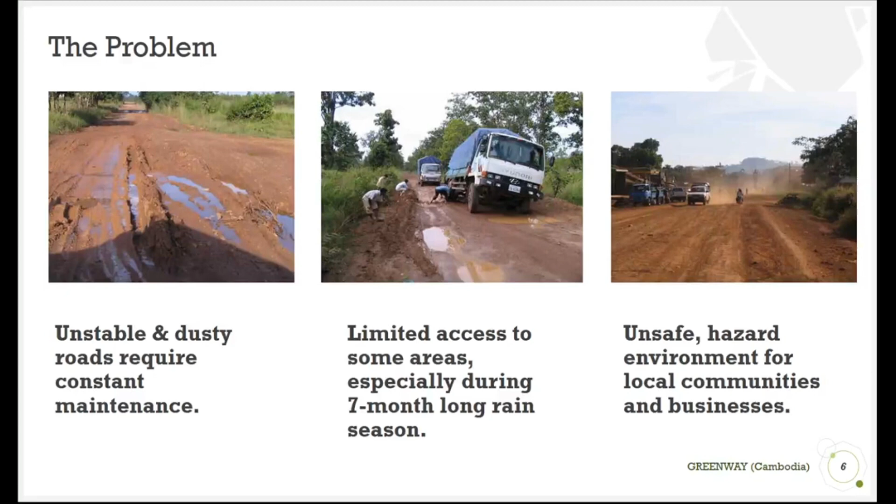It's very difficult for people in terms of daily life, the daily commute. So it's a huge problem. Next slide, please. How big is this problem, specifically talking about Cambodia? Cambodia has over 65,000 kilometers of road, and more than 74% of the roads are unpaved. So this is 50,000 kilometers of unpaved road.

It causes huge difficulties and challenges for people to commute in the provinces, and for the government, it requires huge expenses to maintain these roads. Every year, it requires routine and periodic maintenance. So it's really a huge problem, but step by step, it could be possible to fix with our product in a more cost-effective way. You will see later on. Next slide, please.

What product have we developed to address this problem? The first product is called ROAD//STABILIZR. It's a concentrated liquid form, and once it's delivered into the soil, mixed with the soil and compacted, then you have a road with increased CBR, California bearing ratio. CBR could be increased by 200–300% from the initial CBR, and it gives very high durability of the road.

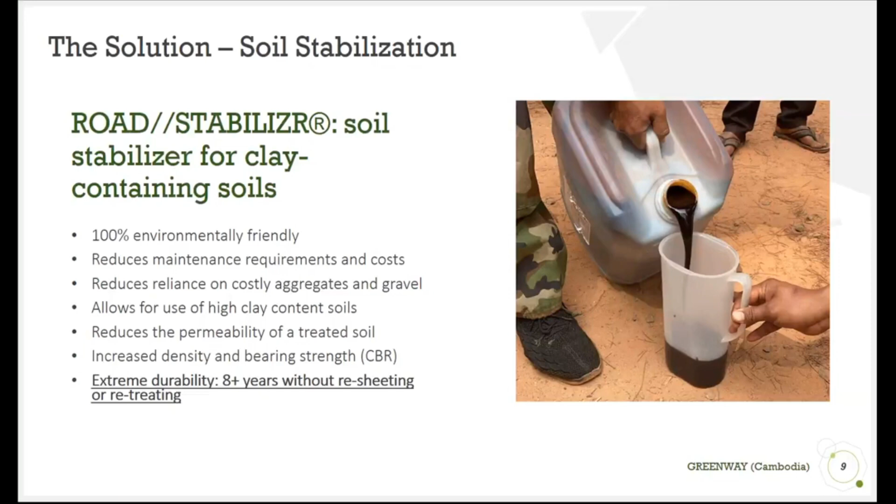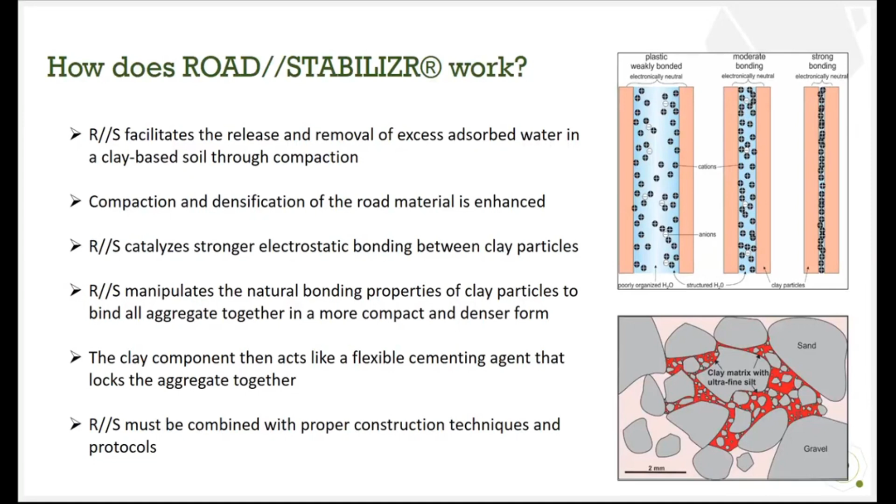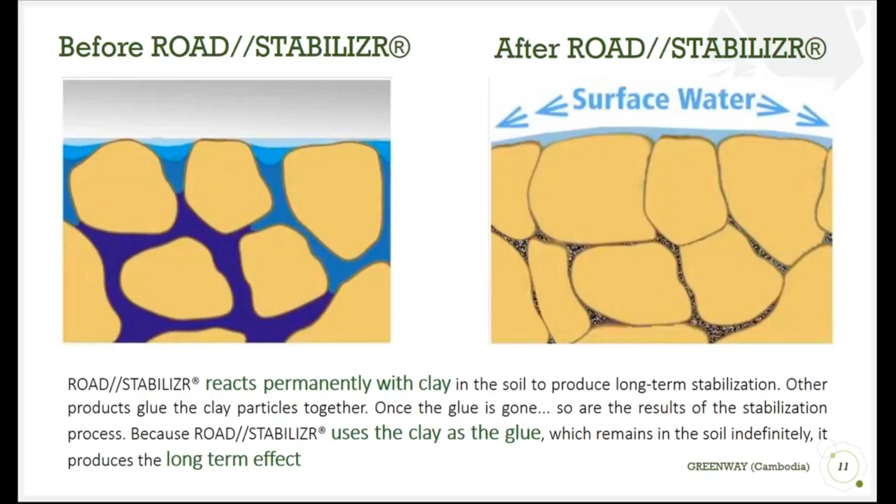How does ROAD//STABILIZR work? It helps to remove the water content from the natural soil, and it works to bond the particles like aggregates, sand, and gravel, to hold and stick them all together. Next slide, please. It changes the clay's structure; it permanently reacts with the clay, so it makes all these aggregates stick together forever. That's why it's a very long-term solution, and the structure is still flexible. Next slide, please.

The second product is called DUST/BLOKR. This product addresses areas where dust emission is very high. For instance, this picture is from an airport area, where dust block was applied to keep dust down and to reduce the maintenance cost for the airport area and also airplanes. Dust block can also be used in many different areas. It can be used in quarries, dusty environments, open mines, etc.

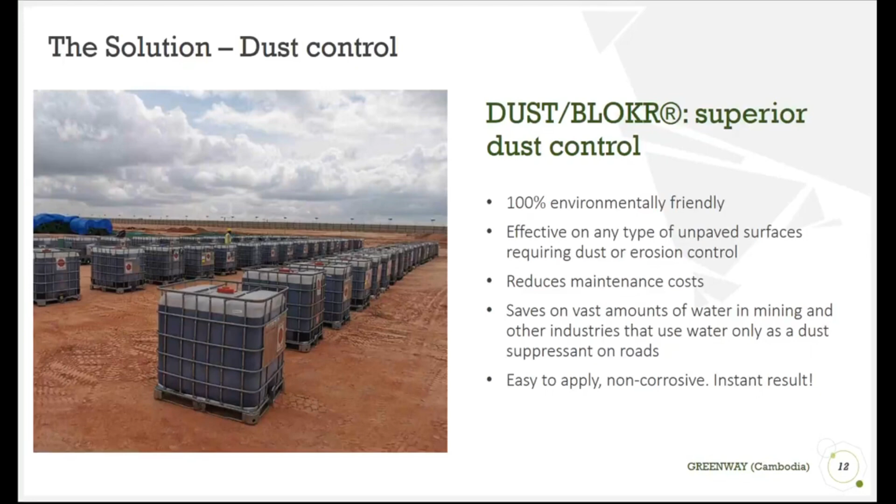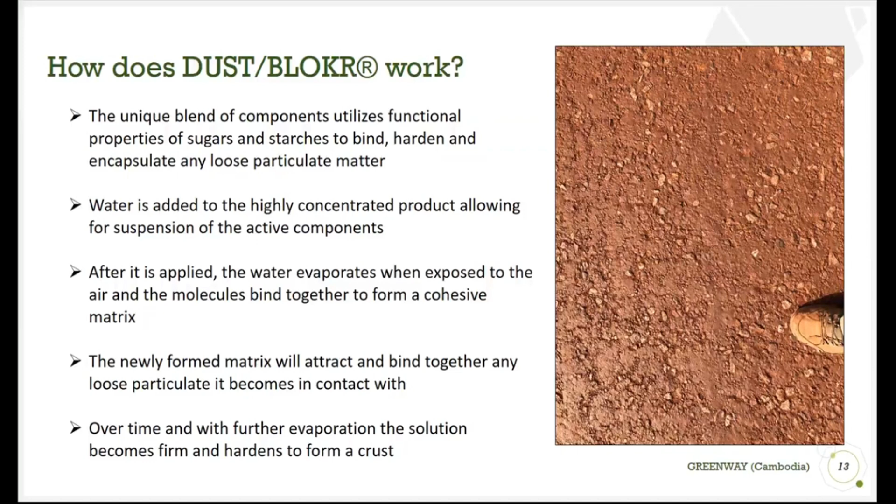It has many applications, and it's not corrosive. It's an eco-friendly product, and the effect lasts very long. Typically you spray water, and the effect from the water lasts a couple of hours maximum. Meanwhile, when you use DUST/BLOKR, the effect lasts much longer. You probably just maintain it by spraying one or two times per dry season. That's all. Next slide, please.

That's all. And like I said, we have many applications around the world, in over 50 countries, like Australia, New Zealand, Myanmar, and even in China we have many projects. Some examples of the roads: this is Canada.

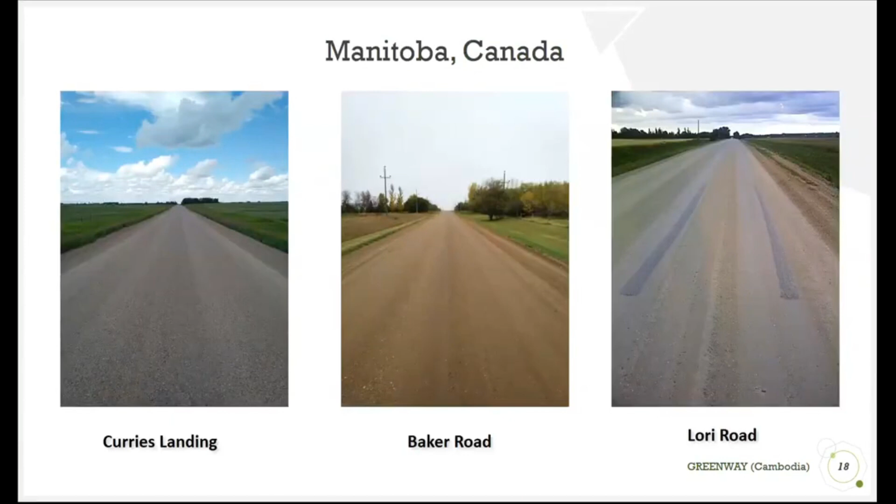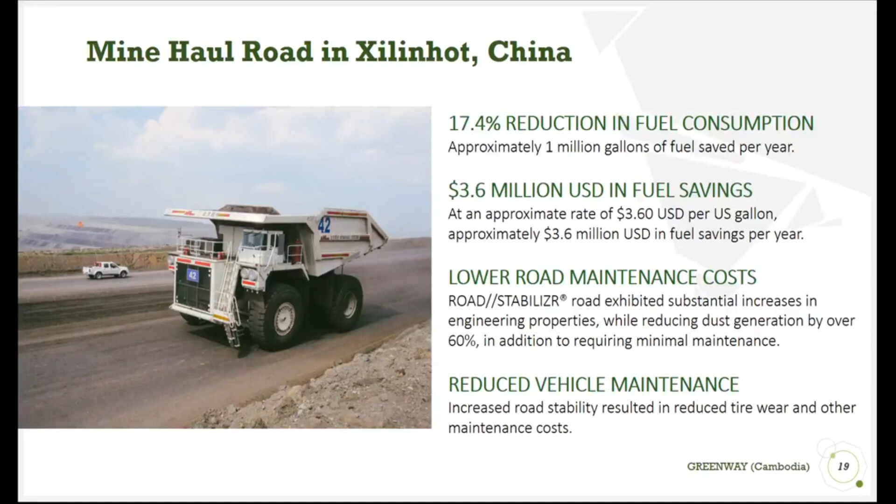Also in Canada, you may notice that the color of the road stays the same, exactly same as the color of the gravel on the road. It's no harm, it's not a dangerous chemical. The mine industry is...

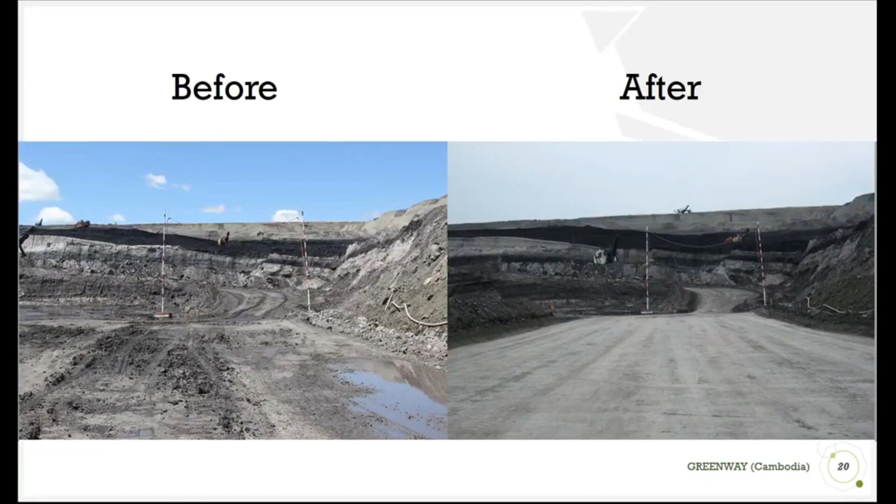Next slide please. Once you change the environment, from what is before and what is after, it's stable, it's not dusty, it's not slippery, it's not muddy, and the mine industry could have a huge saving with fuel consumption, maintenance costs, and all these mine haul trucks, very expensive.

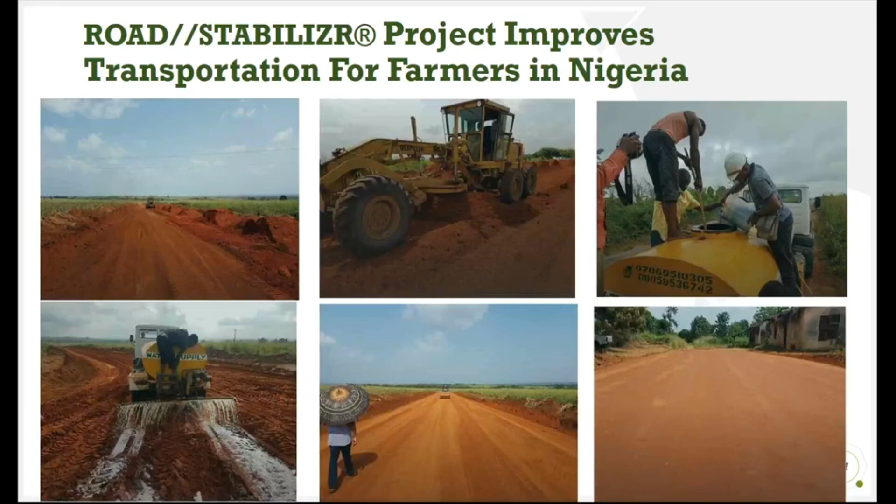So you may think that these huge trucks, like 300-400 ton, one such truck costs millions of dollars. Some samples of projects in Nigeria, in Africa. Next slide please.

Quite similar to Cambodia, right? Some other projects, we can see next one. Yeah, that's in Cambodia, so this is the first private road. I think you know this very well - it's Kirirom Pine Resort, and we stabilized the road there. Next one.

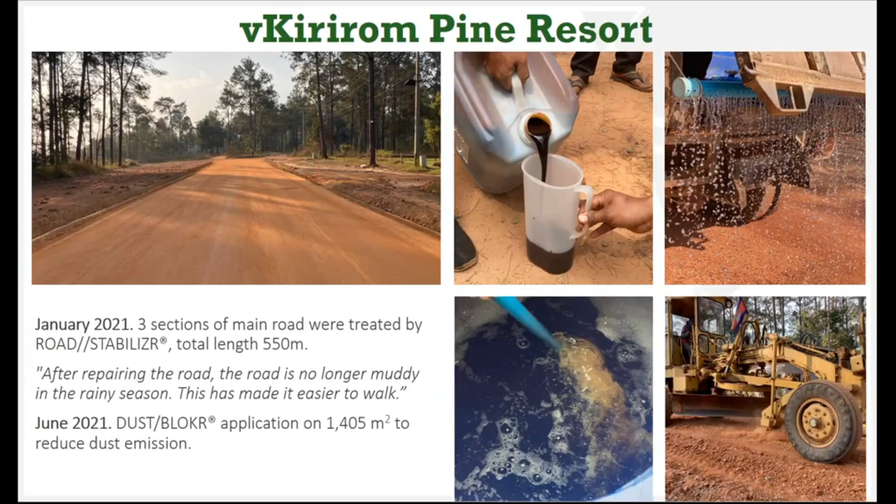And also we have the first public road, just recently done in December after rain season finished, and it's done in December in Kandal.

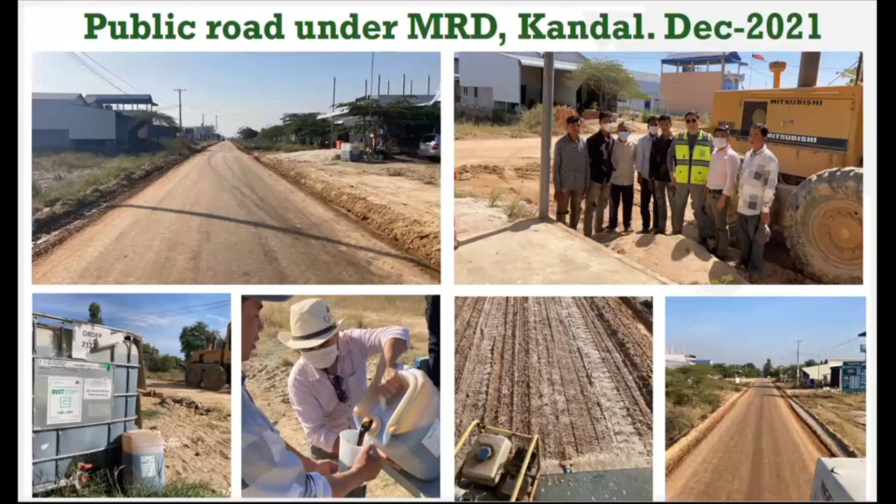In terms of how to apply this product, as you can see here, it requires just standard equipment, nothing very special for the application - just graders, water truck, and roller vibratory steel compactor, and also pneumatic rubber wheel compactors. So all this equipment is accessible everywhere. Next slide please.

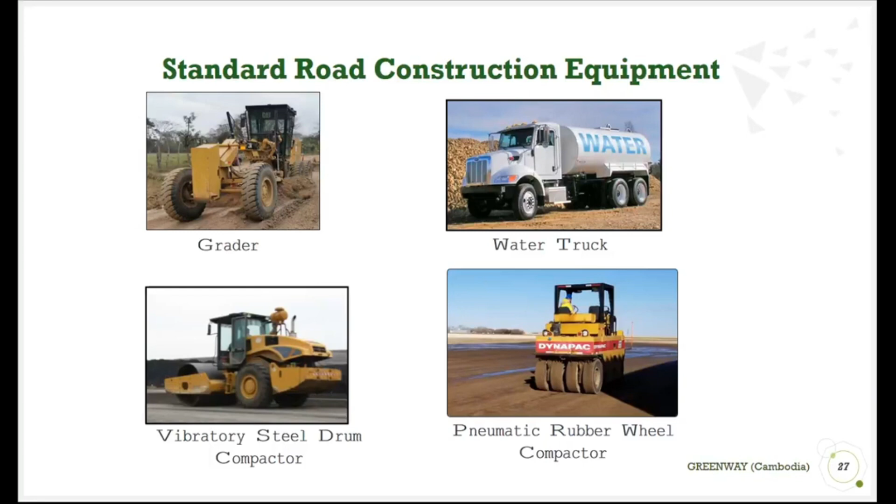And how to apply this? We also follow the standard application protocol, and as future civil engineers, you know this very well - just scarify the soil, spray, and finish with the compaction. That's required for the road stabilizer and for the dust block.

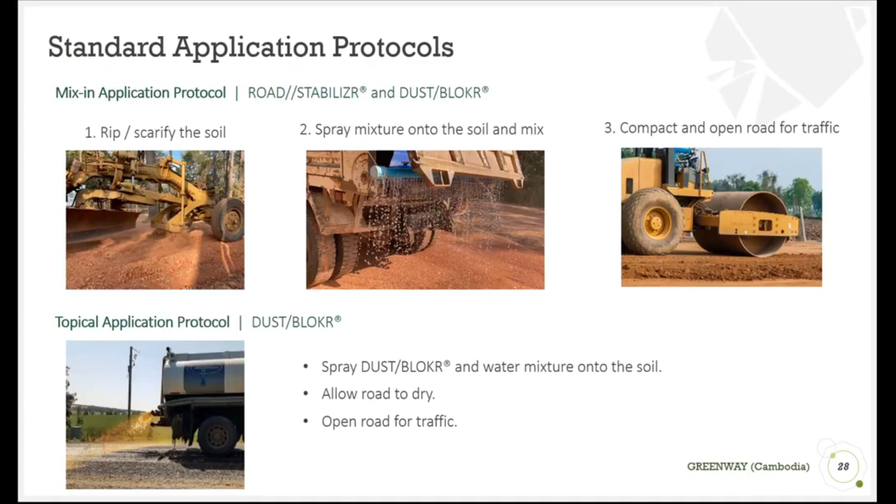For the maintenance of the dust emission, we apply dust block, just spray topically. So we use two methods, mixing and topical application. That's very simple.

I would like to show you a sample of the stabilizer here. So you can see it's a liquid form, and it's safe. It's liquid form here, can you see, right? And this liquid, once it's applied and mixed with the existing soil, can make it gravel like this.

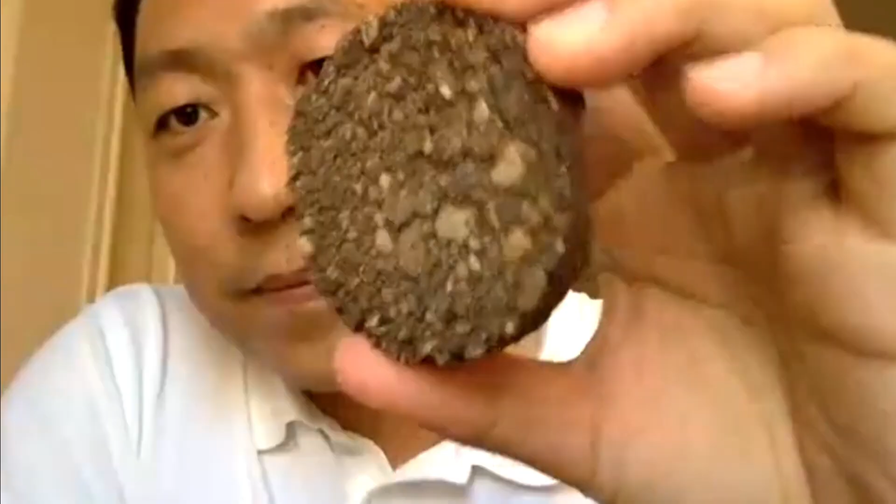So that's all about the presentation of the product. And please, if you have questions...

Okay, thank you Mr. Andre. So now, yes, if anyone has any question, you can ask Mr. Andre. So maybe I can ask you - I can ask you one question before the students here.

From the last slide here, I see you have the solution for agriculture. So what is the solution for agriculture? Yeah, that's an area where our product can be applied.

Why is it needed for agriculture? First of all, in agriculture areas during the harvest, it's a very busy time, and trucks go in and out to transport the crops from the farm fields, right? And usually these are very bumpy roads, and also very dusty roads, and during the rain season they are very slippery roads.

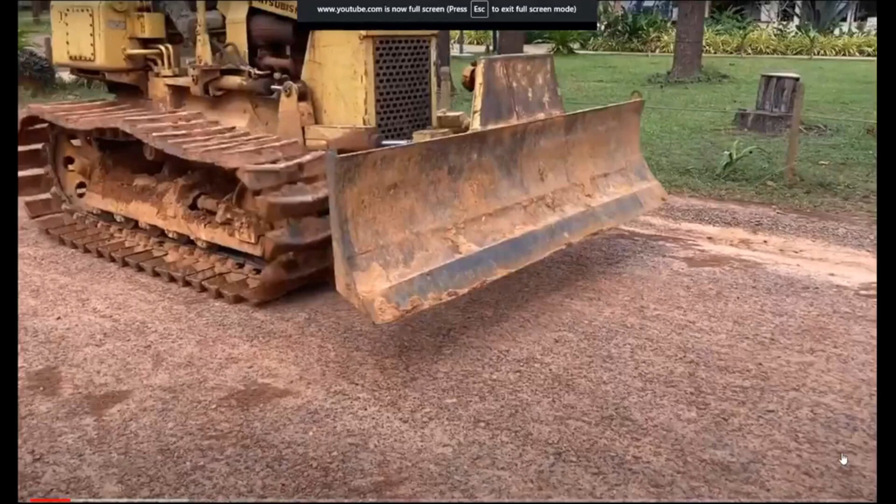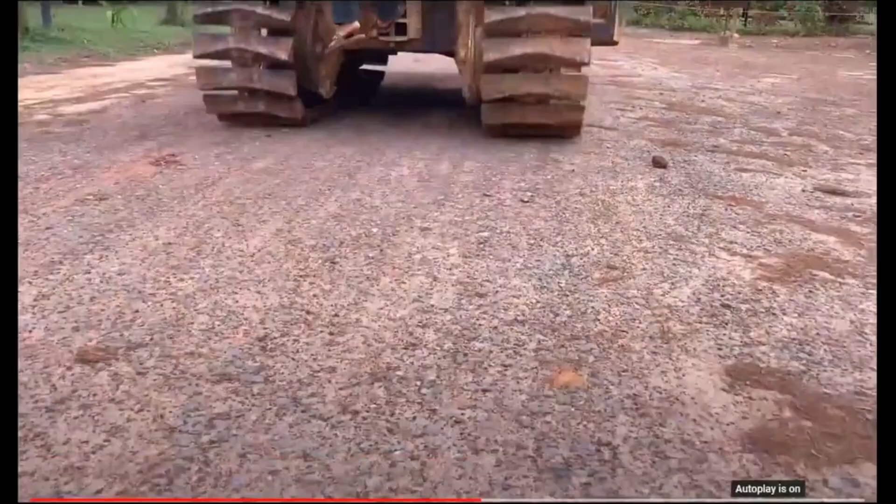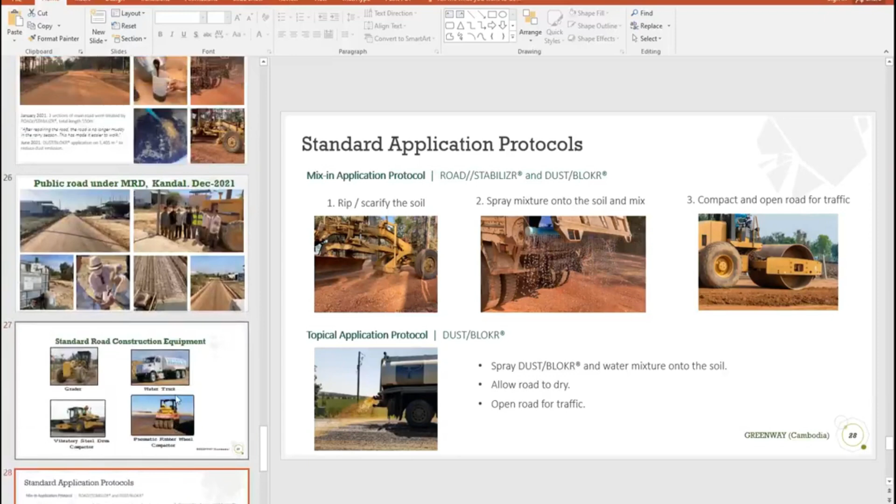I would like to note for all the attendants here: our product, once applied, can make the soil stabilized for many years. But what is very important is how the application is done. Even though we use just a standard application method—scarify the road, mix with the grader, and compact the upper layer—the quality of this job is also very important, as is having drainage done correctly, and the crown, etc. This is the mix-in application protocol. These are the basic requirements, and if the contractor follows these standard requirements, that would increase the quality of the road.

Good, so does anyone have any question anymore?

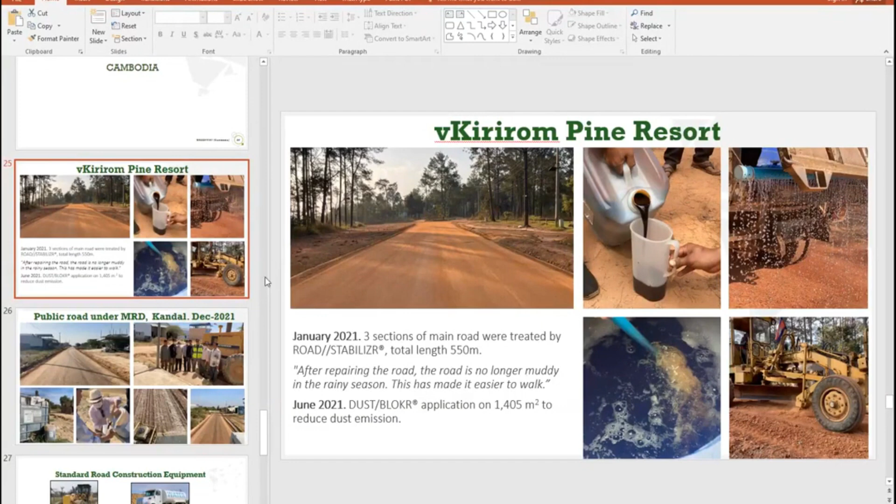So let me ask you one more question. If maybe the students don't understand very deeply about the product, I can propose some questions. For road construction, for example, there's the foundation of the road—we call it sub-base, subgrade—and the other part is the surface, the top part. When we use this product, is it considered for the foundation of the road or the surface? It is for the surface. But how about its foundation, the road foundation? Should we need any stone or gravel to improve the road foundation, or is it just enough to use this product to make both the road foundation and surface?

So typically a road consists of embankment, and the current local practice is to deliver like 20 or 30 centimeters of laterite on top of the embankment. In this case, we are okay just with the embankment, because normally the characteristic of the embankment soil is enough. For each application, we do a soil test—for plasticity we check PI, and we also check the grading. So we see what the soil is, and if plasticity is enough, we can apply the stabilizer. The grading chart also shows us how big the size of the aggregates and gravel in this soil is. In general, we can apply stabilizer on a wide range of soil. So saying this, we can say that the embankment, once we stabilize it, is already strong enough.

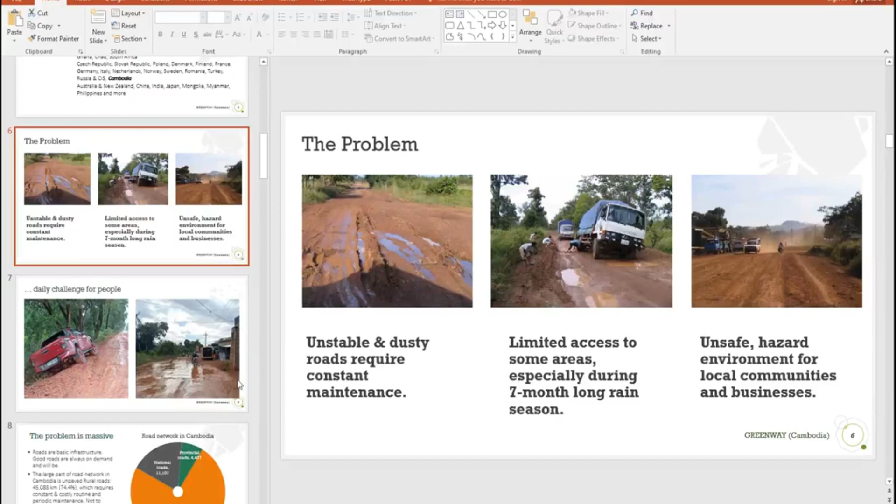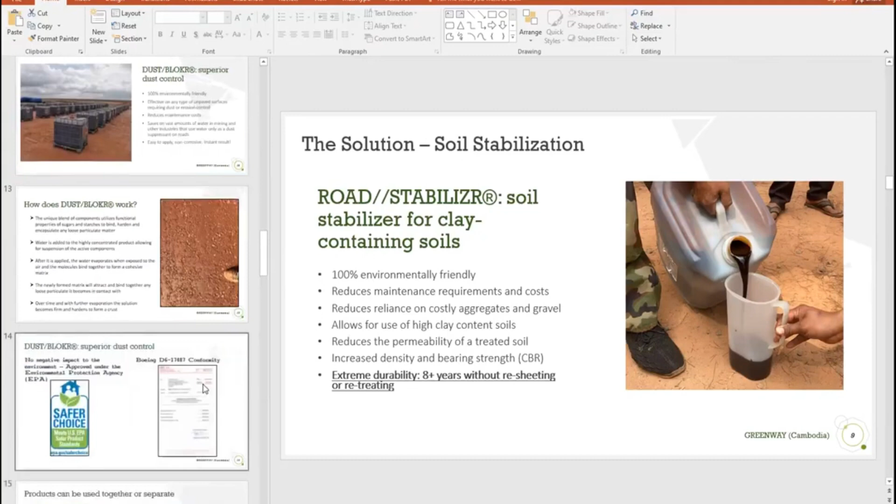Not only cement, but also other stabilizers like lime, for instance, are more difficult to apply. Second, it's more expensive - cement is very expensive. Also, cement stabilization has quite a limited area to work with the soil. Why? Because if you add more than 7% cement to the soil, it increases strength but loses the flexibility of the soil.